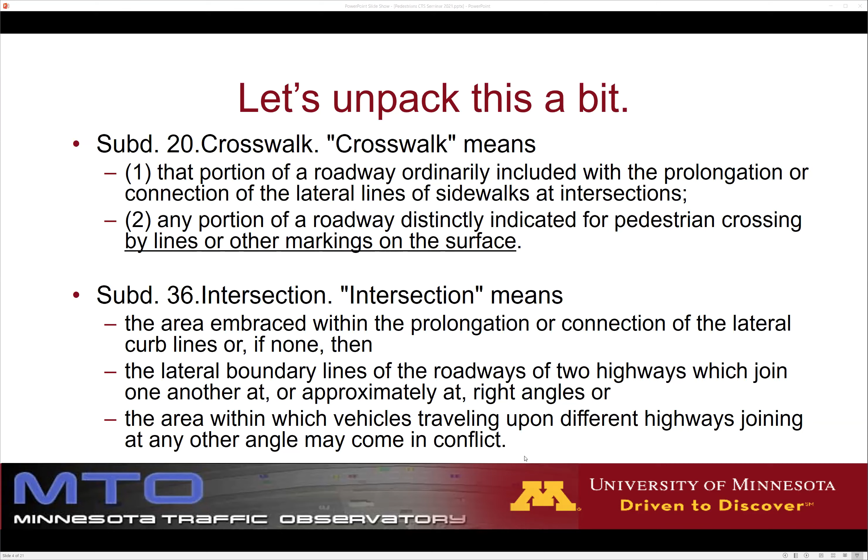And there has to be a sidewalk. Now, a little bit of the fine print. If a pedestrian is crossing a roadway at any point other than a marked crosswalk, at an intersection with no marked crosswalk, meaning an intersection that doesn't actually have sidewalks, shall yield the right of way to all vehicles upon the roadway. To me, that was new, because the general description is that pedestrians have the right of way everywhere.

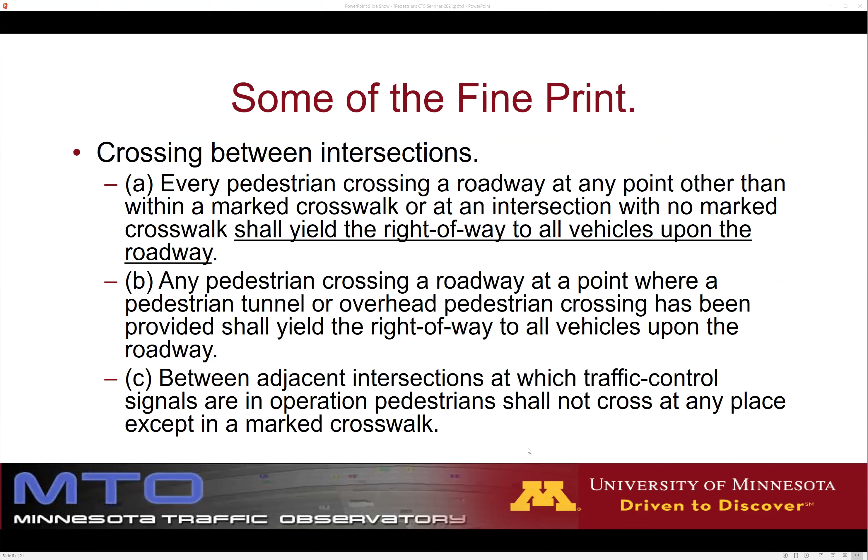Well, not entirely. So jaywalking is not legally a violation in Minnesota, but you are supposed to yield the right of way to vehicles. The other thing is that if there are facilities provided for pedestrians to cross a roadway, like a tunnel or overhead crossing, or you're near an adjacent intersection with traffic control, then pedestrians shall not cross at any place except those, or have to yield the right of way to vehicles.

Actually, I'll come back on this. So finally, my last part of fine print is the rights in absence of a signal. If there's a traffic control signal, the instructions are theoretically clear. But if there is no signal and the pedestrian is using a legal crosswalk, the driver must remain stopped until the pedestrian has passed the lane in which the vehicle is stopped.

Basically, what that means is that if you have a multi-lane road, the driver can start moving and cross as soon as the pedestrian has moved away from its lane. So if a pedestrian has to cross three lanes and the vehicle in the rightmost lane has yielded, as soon as the pedestrian has moved, it is allowed to continue, even if the pedestrian hasn't completed the crossing. That is a little bit of fine print that has been generating problems.

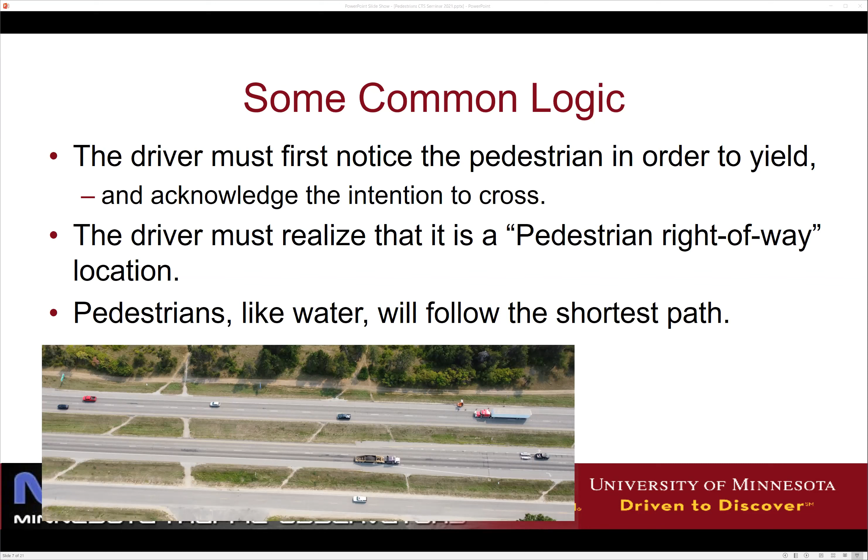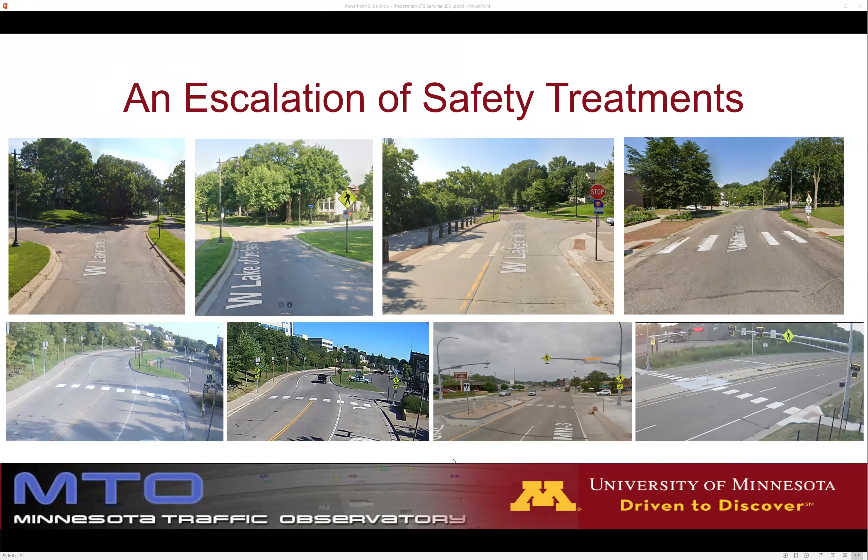So, as I said, all our research at the Minnesota Traffic Observatory, hence our name, depends on observations. We have developed our own camera systems and deployed them all over Minnesota - in roundabouts, on highways, in the middle of nowhere, and in the most heavily populated places.

So the very first research - and I want to open the chat just to make sure that I don't lose any questions - the very first research that I had at the MTO was in 2010, where there was a lot of discussion and a lot of problems regarding the safety of pedestrians in modern urban roundabouts.

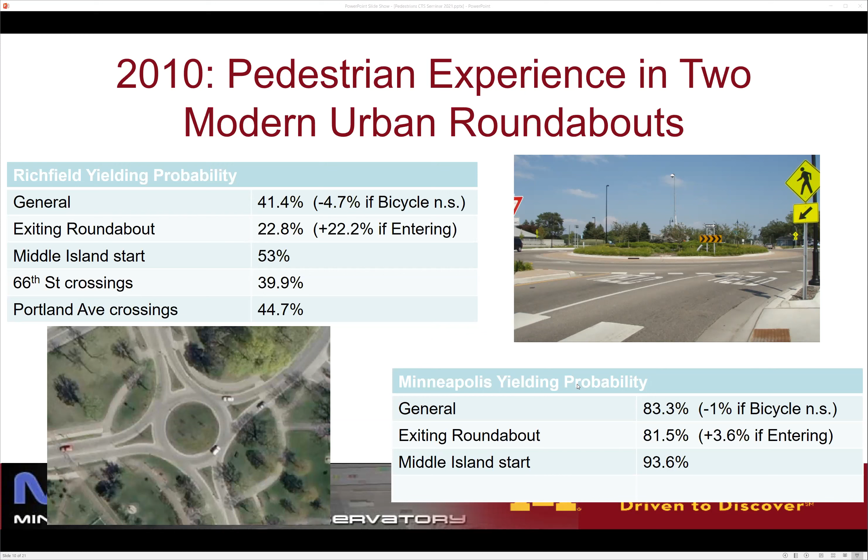It was very interesting. Here are some summary findings: basically when the pedestrian is on the island, the probability of yield increases. The hypothesis is that when the pedestrian is on the island, in the middle of the road, there is no ambiguity. The driver cannot pretend they may not want to cross. So either consciously or unconsciously, the importance of yielding to that person becomes more clear.

On the other hand, at the exits, our hypothesis was that drivers needed to exit the roundabout and may not be in the area where conflicts were prevalent. Another hypothesis, unfortunately none of these were established through data, is that vehicles exiting the roundabout don't have a clear view of the pedestrian because the crossing is rather away. I don't particularly believe that excuse, because there's plenty of room for them to stop before the crossing after the exit, but the numbers don't lie.

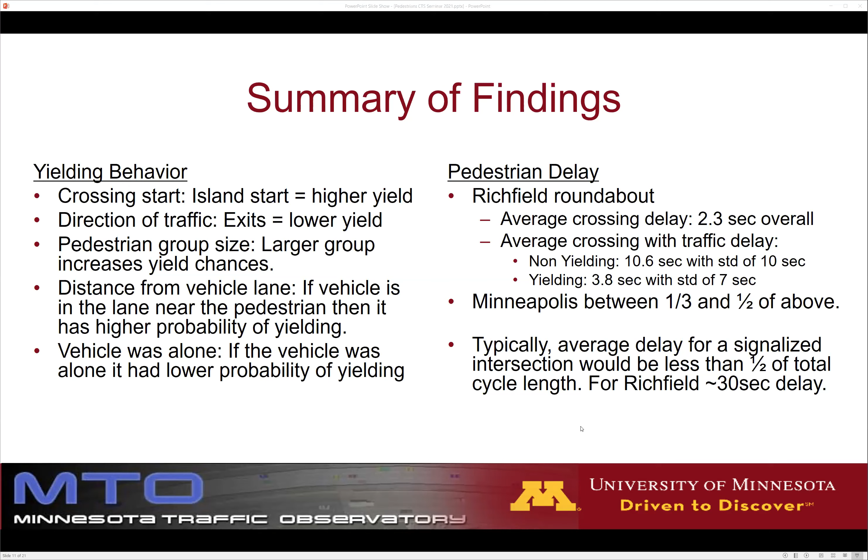So the bottom line here is that yes, crossing at a location, in this case a roundabout, but it's the same in other places where the yield rate is 40%, is frustrating. But in 12,000 crossings, we didn't see any crashes. We only saw 3 close calls, and they all involved bicyclists who rode the bicycle across the crossing. And the delay is a third of what it would have been.

So yes, it is frustrating. Yes, you have the right of way as a pedestrian, but you're not being awarded the right. You don't enjoy it.

But on the other hand, it's not dangerous. So the next project, the report was published in 2020. The project started in 2018, so I put 2019. We basically wanted to assess the impact of a variety of pedestrian-activated crossing systems.

These are all systems where, either automatically or through a button, the pedestrian activates a mechanism that enhances the message to the driver that they need to yield. So we had 19 RRFBs, 6 flashing LED signs, 4 HAWK signals, and 2 standard signal sites.

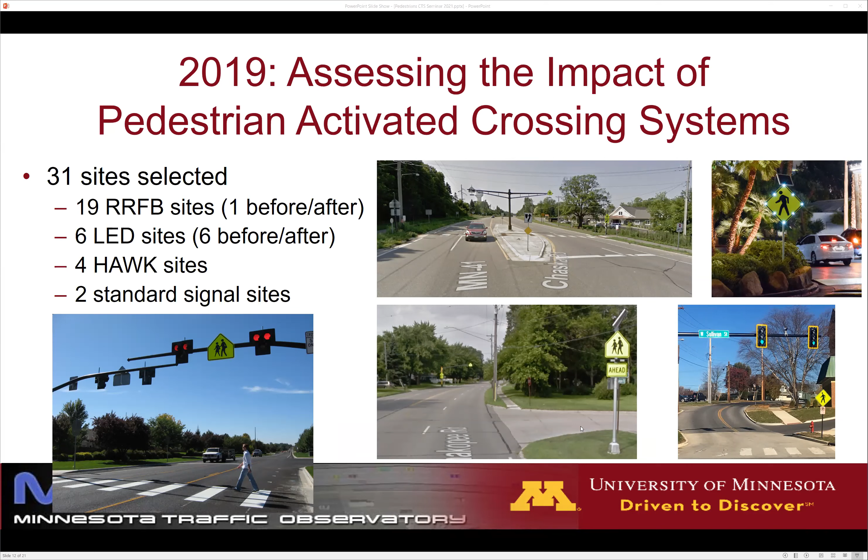And we tried to vary, obviously, the treatment type, but also the speed limit, the volume of vehicles, the number of lanes crossed, whether there's an island so it's a two-stage crossing or one stage, the intersection type, and also the surrounding area, whether it's urban, rural, or a school zone.

And you see here some extreme results. At the bottom, you have a high-speed highway. This is actually a school crossing, and you have 8 directions where vehicles can come and interact with pedestrians crossing. So that's a lot of threats around, and a lot of different angles that drivers have to yield from.

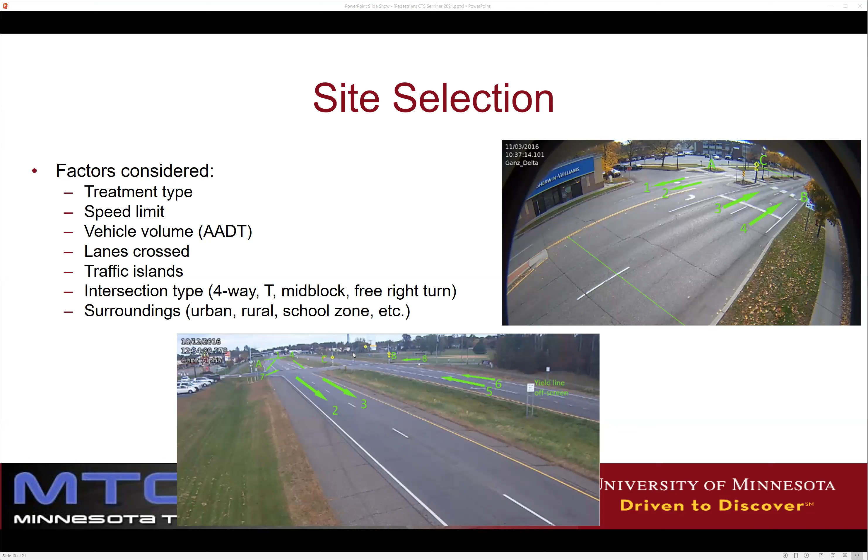So I'm not going to go through this slide, but just to give you a quick idea of all the questions that we hoped and tried to answer in this project. And let's look at HAWKs.

The yield rate, as it is nationally advertised, is very high when activated. So when the pedestrians are on the island, in the case of 2 of the 4 HAWKs that had an island in the middle, we were at 90 and 80%.

Interestingly, when you had the hawk crossing, but the destination was not the island, yield rates were observed to be at 60%. And at that time, we didn't exactly scrutinize that because the project was mostly interested in RRFBs.

That's what MnDOT wanted to gather information on, because one unspoken question is, can I avoid spending the 300,000 of a hawk if I put the appropriate RRFB or flashing LED? But here we see that even when not activated, the yield rates are relatively high.

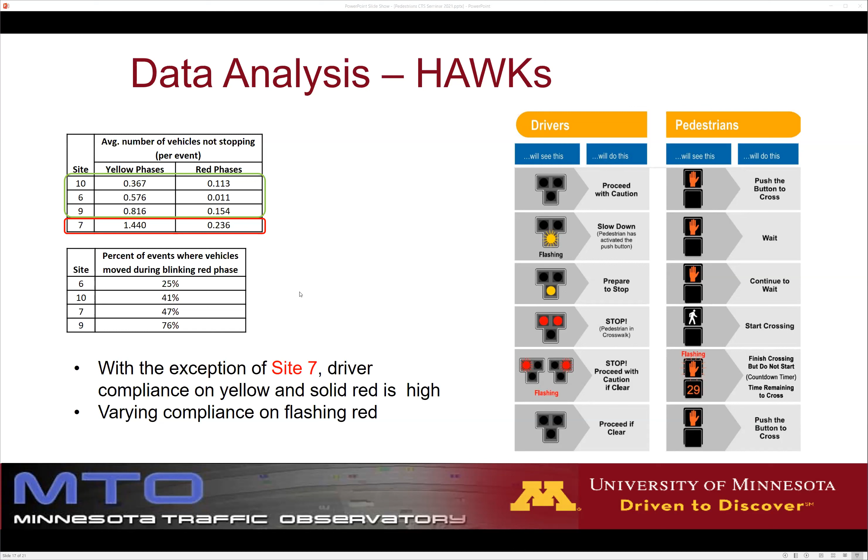Moving on, because I'm pretty sure I'm running out of time. What I would like to press on, and I'll finish with this: pedestrian activated crossings are effective at sites that don't have good sight distances and/or advanced warning. The fact that in all our research, even when deactivated or not activated, they beat the yielding percentages experienced in unmarked crossings and crossings that only had the zebra crossing, basically says that a lot of the benefit comes from the additional static signs.

So RRFBs with overhead mounting had higher yield rates, inactive, than RRFBs without overhead hanging. Why? Because the more visual stimuli to the drivers reinforce the message that this is a crossing. Speed limits did not make much of a difference. And the higher number of movements conflicting with the crosswalk both increased the activation rate, but also increased the importance and the benefit you're getting from this.

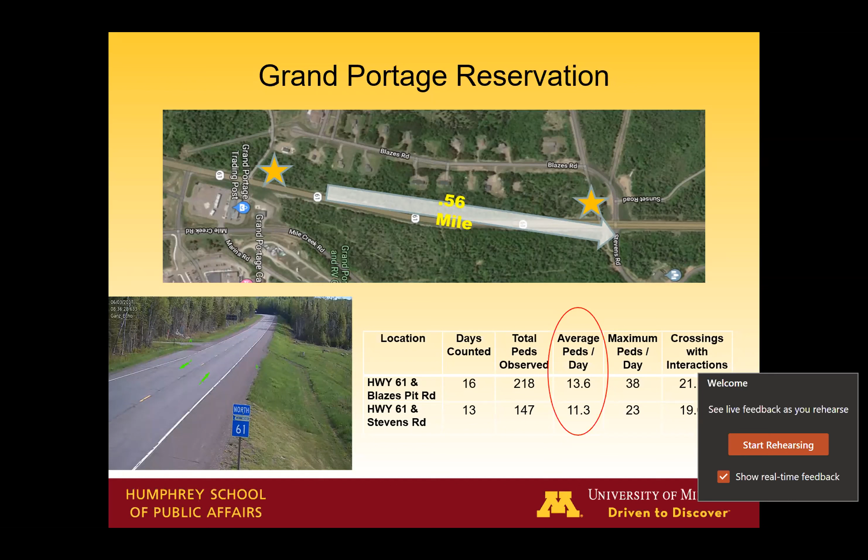As a result, it turned out MnDOT had scheduled a resurfacing of Highway 61 this summer. Because of the project and the information about where people were crossing, MnDOT was able to incorporate new countermeasures, including gate-posted crossing signs at the two places with a lot of crossing - the informal one and a formal road crossing further north. There's continental block pavement markings at both places, and they added sidewalk and trail facilities leading to the crosswalk so pedestrians would have a place to wait.

In addition, to help warn drivers, MnDOT was able to put in place LED blinker lights indicating peds and bikes for the next mile. The idea was to think about this as a corridor, so that when people enter the heart of the reservation where there's greater population density, drivers will be more aware. That distance includes the two crossing locations and road segments where pedestrians and bicyclists have been observed.

So this is a situation in which knowledge about where people, in some cases adolescents, were crossing the road independently, we were able to incorporate into a planned project - marginal changes that help address the safety issues of concern to the tribal community. John has already shown you an example of the hawk signal now installed at Mille Lacs. We'll give you some of the backstory here.

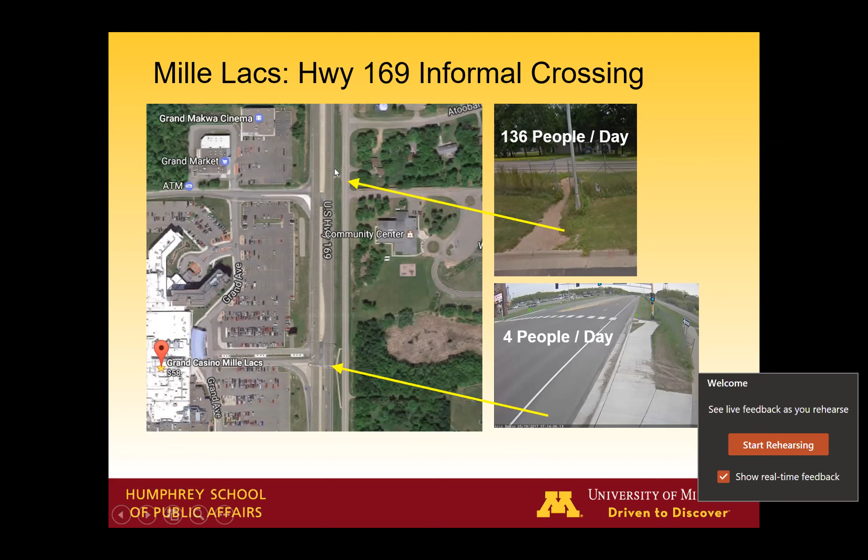And this was a concern. This gives an example: mother crossing with a stroller, children on bikes, people walking in the median.

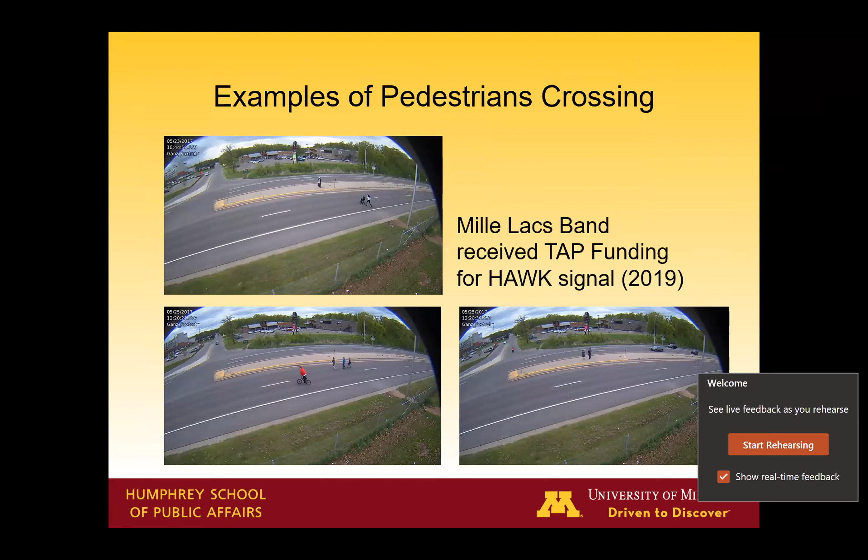So Mille Lacs was able to put together transportation alternatives funding for the Hawk signal. It was completed just this fall. And as I mentioned, we're now going to do...

A phase 2 evaluation. So if you think about what this involved, the project was conceived in 2016. We began monitoring in 2017. With the results, the Mille Lacs tribe applied for and received TAP funding from MNDOT. Design and planning occurred in 2020. There was some delay with COVID. Construction began in '21. Mille Lacs now has posted a training video, and we're starting with phase 2.

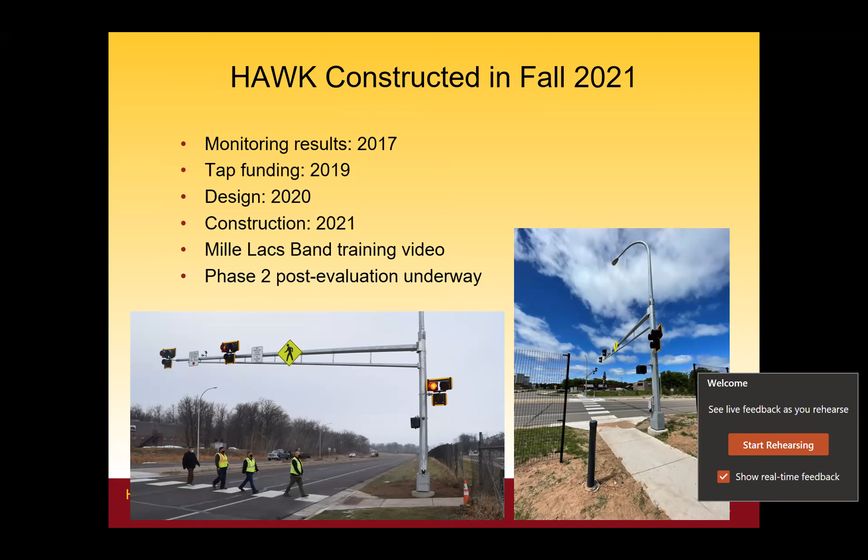So it gives you an idea of the outcomes associated with a research project that was trying to document levels of risk. There's some insights I think we can draw from the project that present challenges as we think about how best to address pedestrian safety concerns throughout the state, and particularly on reservations and in other rural areas. We found that the daily crossing volumes were low.

None of the locations met warrants, and none of the locations that the tribal council and transportation managers identified were ranked highly or even included on countywide safety plans. However, the risk that we identified is real. People don't expect to see, for example, children walking across Highway 169 unaccompanied by adults at a place where there's no crossing.

One of the things this shows is that because the sites we investigated were identified by the tribal elders and transportation managers, often in response to concerns expressed by reservation residents and tribal members, the lived experience is important and it can be addressed.

Another insight from the project is that collaboration is essential. What we found was that the more we had MNDOT engineers with tribal representatives, county engineers, and people from the university talking about options, the more they were able to identify things that could be fit into projects already planned. Sometimes these are lower-cost countermeasures; other times, like the Hawk signal, they're more expensive.